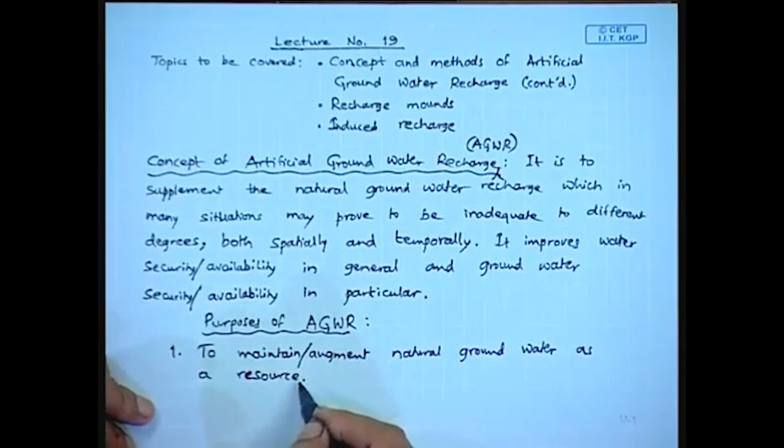This resource is an economical resource as well as an overall resource, because there are certain parameters which cannot be quantified economically, such as intangible benefits. Once artificial groundwater recharge is adopted, it will also result in other intangible benefits like improvement in flora, fauna, and other things, all of which may not be quantified.

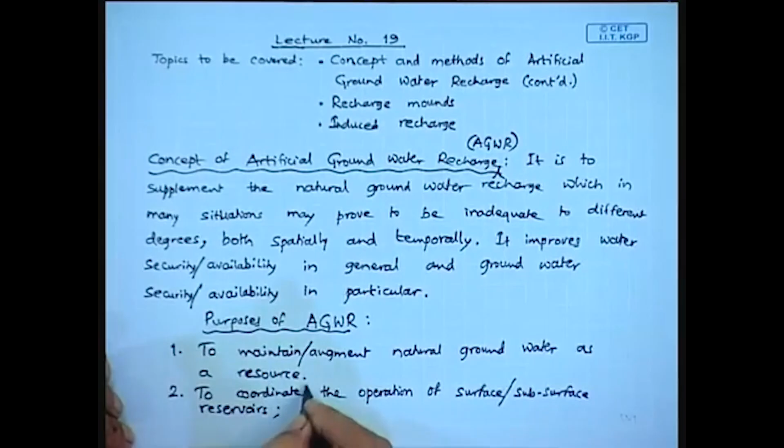The second purpose is to coordinate the operation of surface stroke subsurface reservoirs.

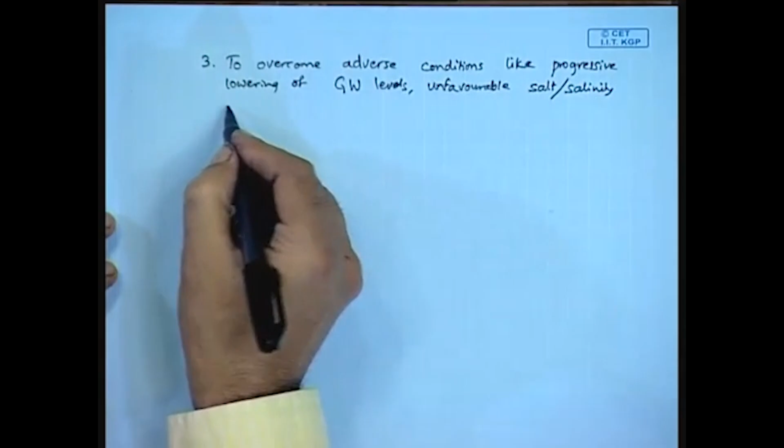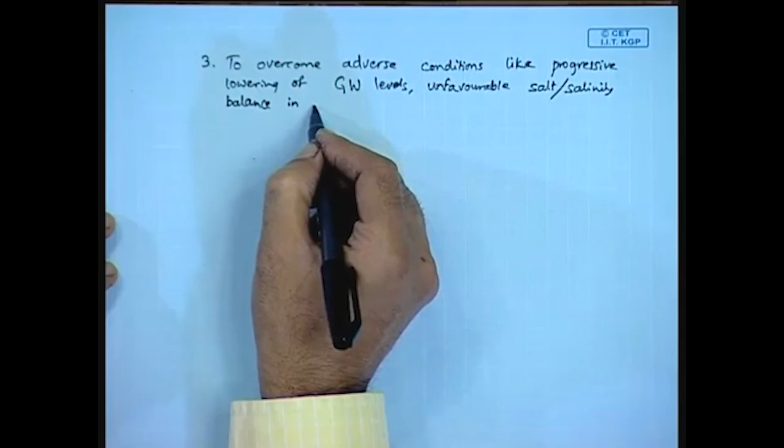The third purpose of artificial groundwater recharge is to overcome adverse conditions like progressive lowering of groundwater level, and unfavorable or undesirable salt or salinity balance in water, which includes salt water intrusion, salinity intrusion, or brackish water intrusion.

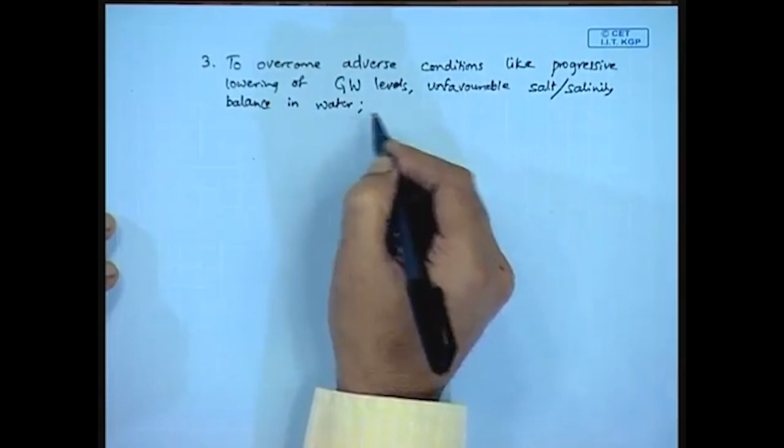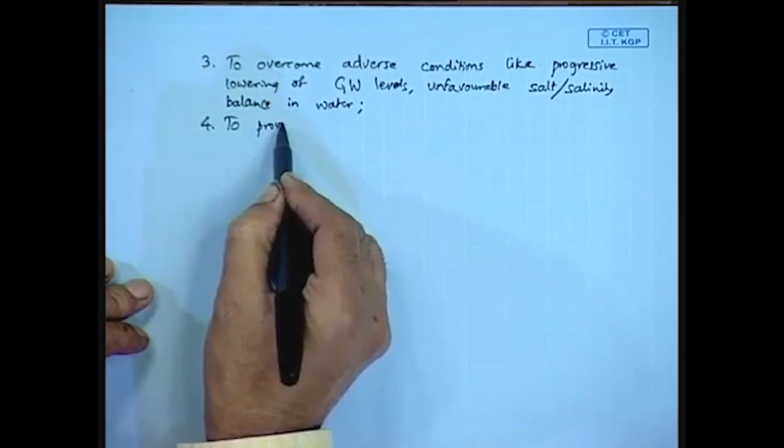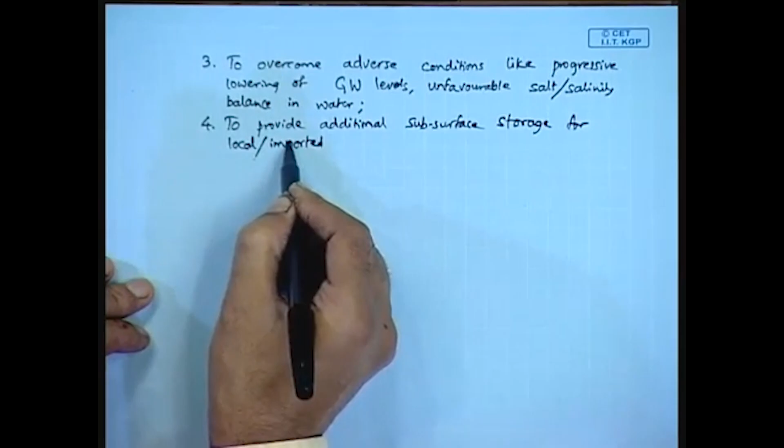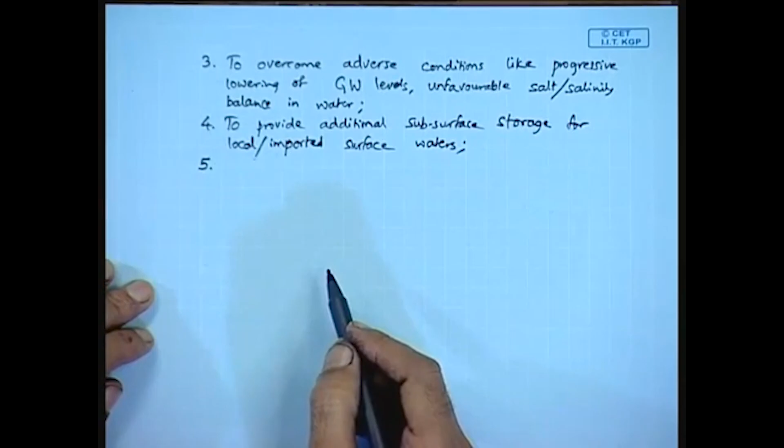This is the third purpose, and the next one is to provide additional subsurface storage for local or imported surface water. Once we employ artificial groundwater recharge, it provides an additional subsurface reservoir, which can be used locally or transported over short, medium, or long distance.

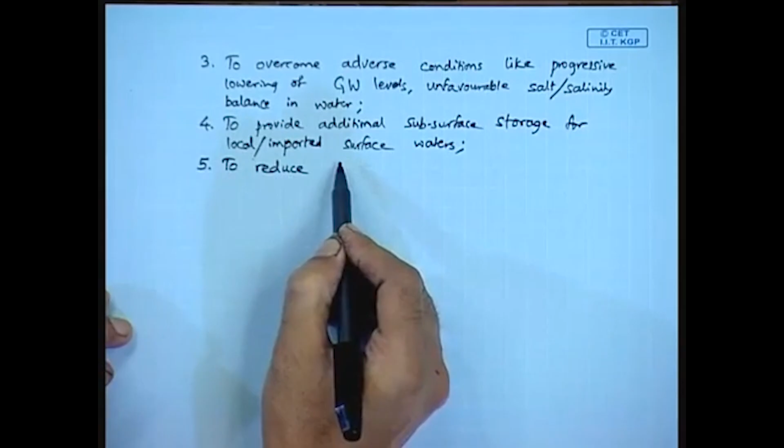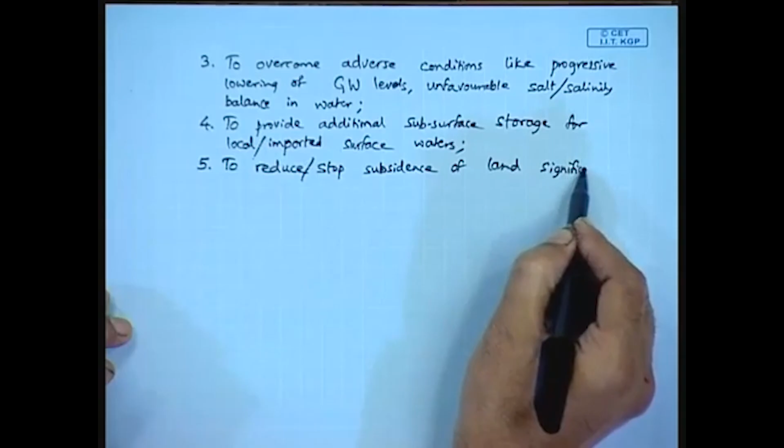So to meet the appropriate water use, next is to reduce or completely stop subsidence of land significantly. Once artificial groundwater recharge is adopted, it will improve the moisture content in the soil, and thereby improve the strength of the soil, making it less susceptible to erosion. It will also be less susceptible to subsidence, like foundation settlement - unequal settlement or total settlement in all areas, which results in land subsidence. That can be reduced or stopped completely.

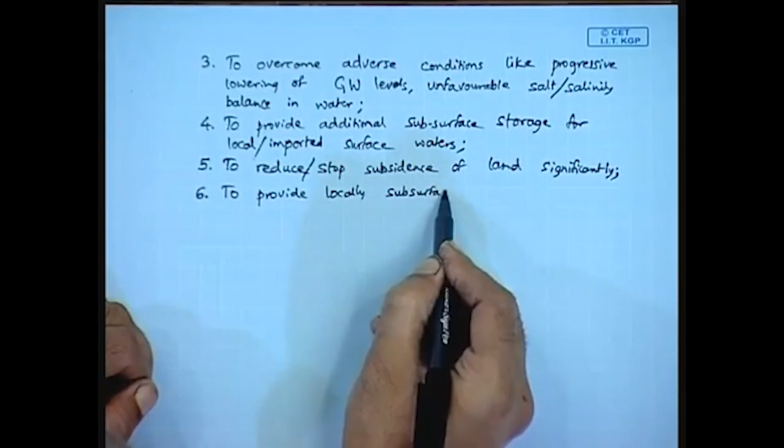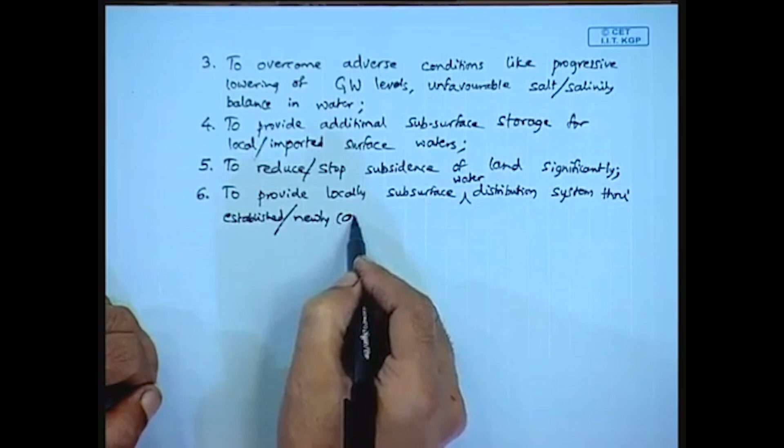The next purpose is to provide locally a subsurface distribution system - this is subsurface water distribution, meaning basically groundwater distribution system, through established or newly constructed wells.

So we will ensure that there is an adequate supply of subsurface water, which can be harnessed through already established wells, existing wells, or newly constructed wells. So this is the sixth purpose.

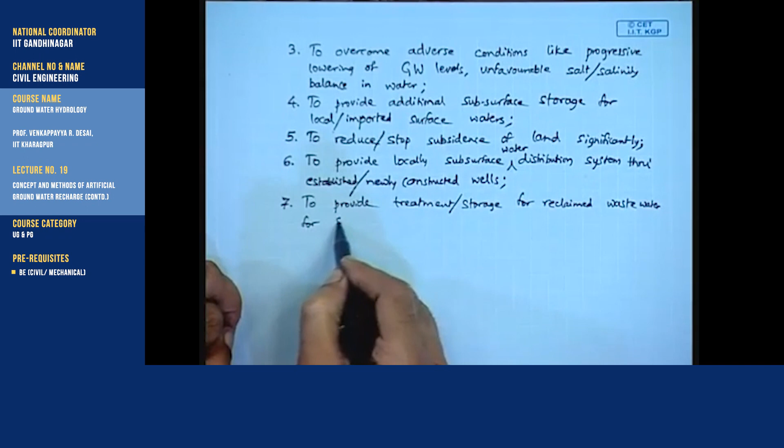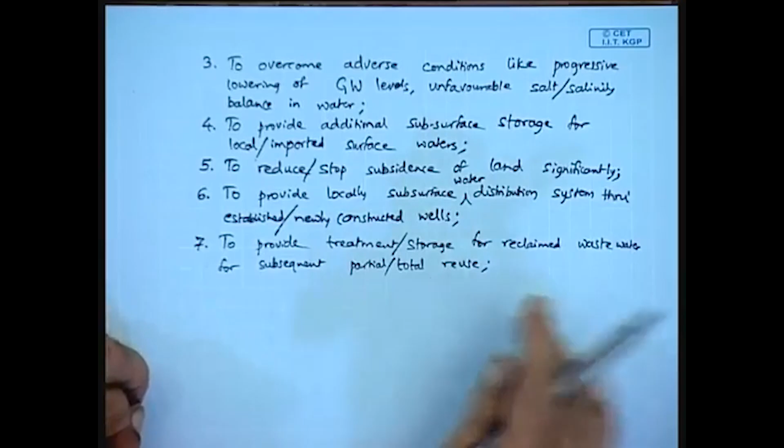So when this wastewater is reclaimed, the artificially recharged groundwater ensures that the reclaimed wastewater is further diluted, thereby minimizing the concentration of pollutants in it. Many times it may be within the permissible limits, or even much below them. In such cases it can be used either for partial reuse or total reuse.

Here I can give an example of this NEWater. In Singapore, some fraction, maybe 5% or 10%, of the water being supplied is added with such treated reclaimed wastewater. So that is this purpose.

And lastly, to conserve or extract energy in the form of hot or cold water.

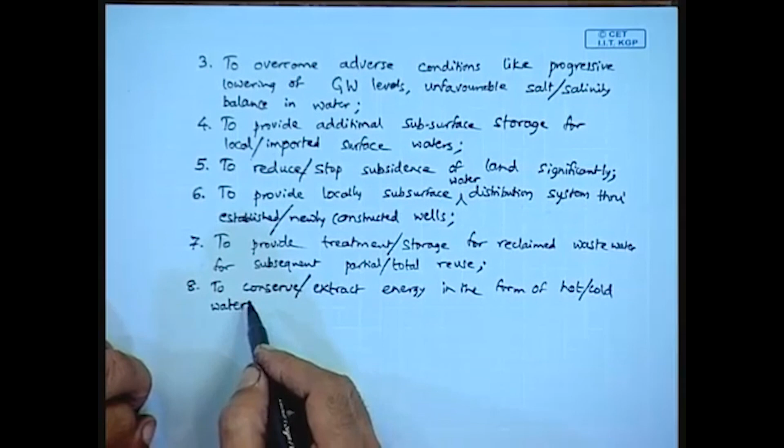We know that there is always an optimum depth below ground where the temperature variation is minimum, and we can utilize this fact to our advantage, creating a reservoir through artificial groundwater recharge.

You can create a reservoir which may be of great help, especially in winters, which is also known as passive air conditioning technology, or in summer when it is too hot, it may be able to provide water significantly colder than the extreme summer temperature.

So all this can utilize the ground as a reservoir or insulator, wherein temperature variation can be reduced. These are the purposes on which the concept of artificial groundwater recharge is hinged.

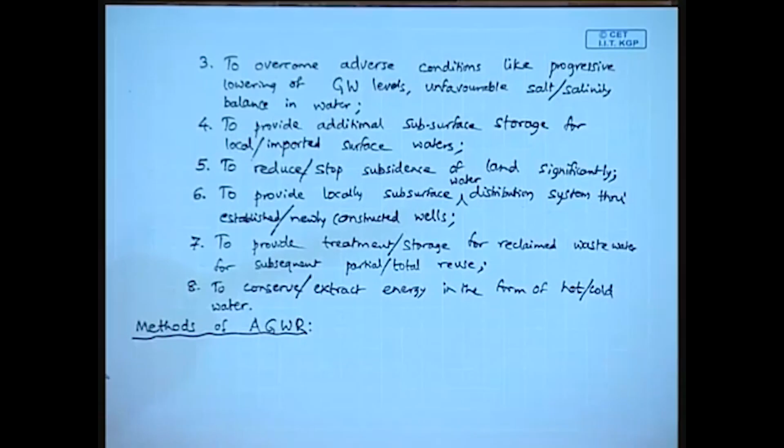Now we will go to the methods of artificial groundwater recharge, that is AGWR. There are various methods for artificial groundwater recharge. Let us list these methods and then briefly discuss them one by one. The first one is the basin method.

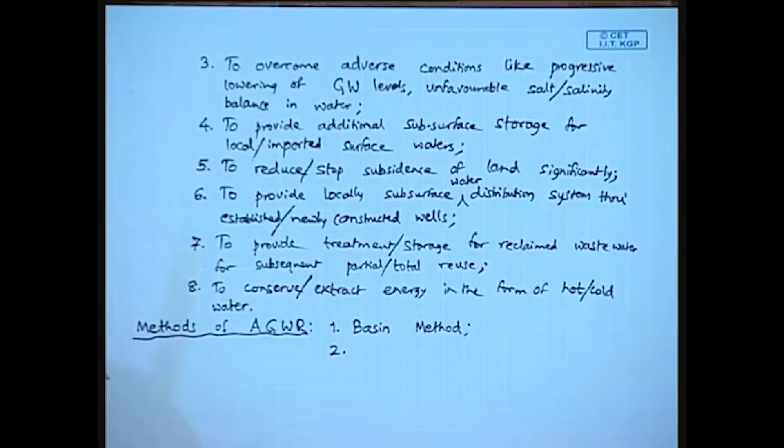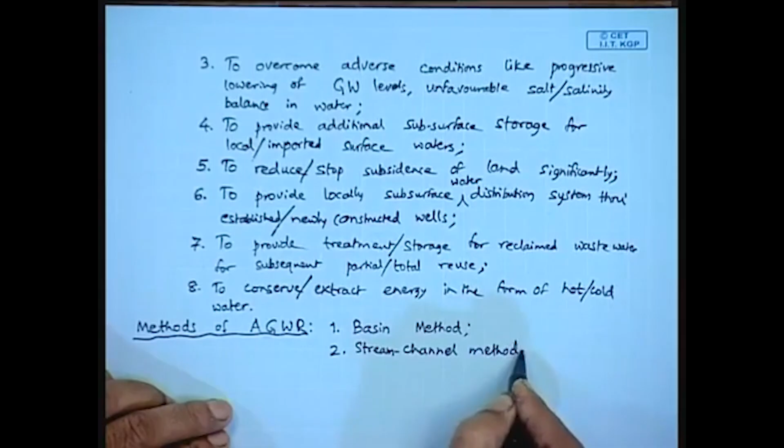This is followed by the stream channel method, and then the third method is the ditch and furrow method.

Then there is the flooding method. The fifth one is the irrigation method. And the next one I am writing here, that is the pit method.

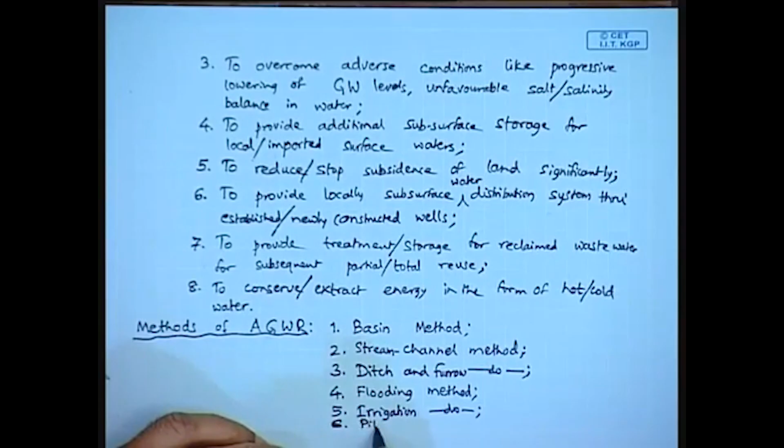Then lastly, let me write here only, the recharge well method. So these are the 7 methods which are generally used for artificial groundwater recharge.

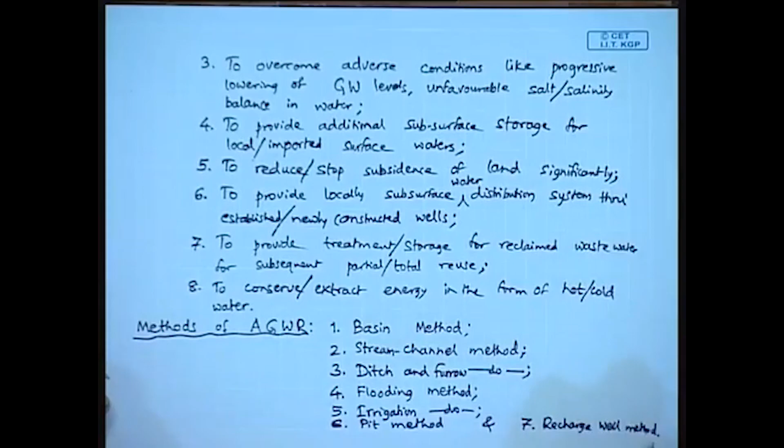Now we will briefly discuss these methods, and the names of these methods, the titles of these methods of artificial groundwater recharge, are self-explanatory. Now first let us go to the basin method of artificial groundwater recharge. I am extensively using the abbreviation AGWR, which is artificial groundwater recharge.

In this method, whenever there is an excess supply of surface water, this surface water is stored in a basin which is in the vicinity of a stream or a water body. For example, suppose there is a stream.

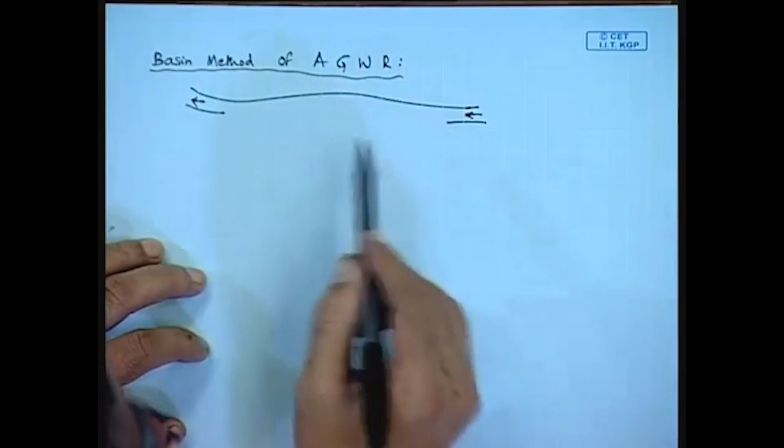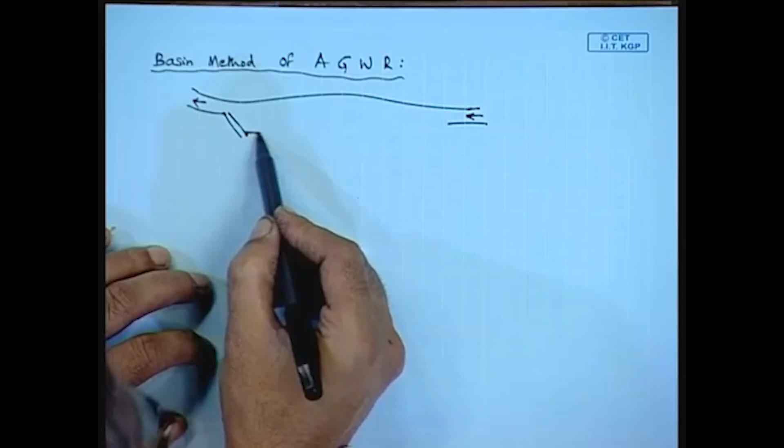Suppose there is a stream, and let us consider the flow is from right to left in this stream. Here is what this basin method does: an additional basin is created.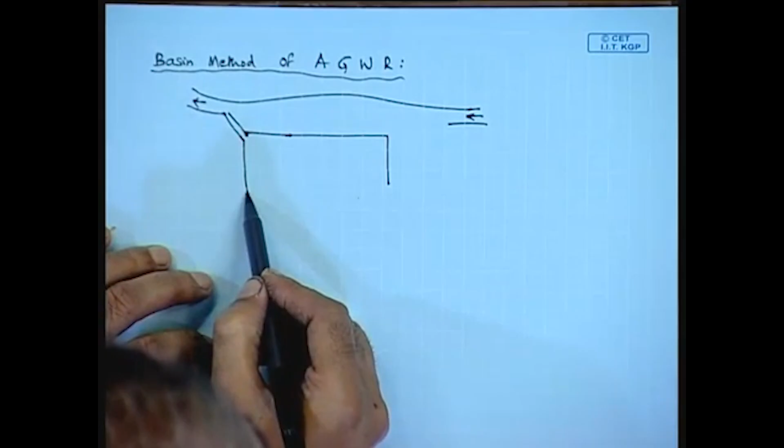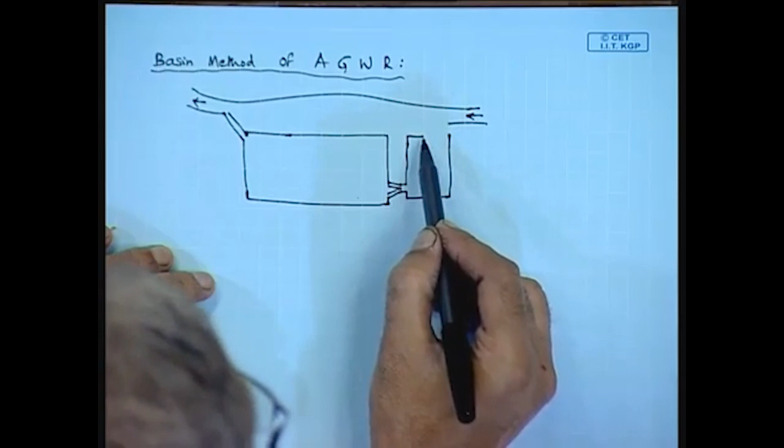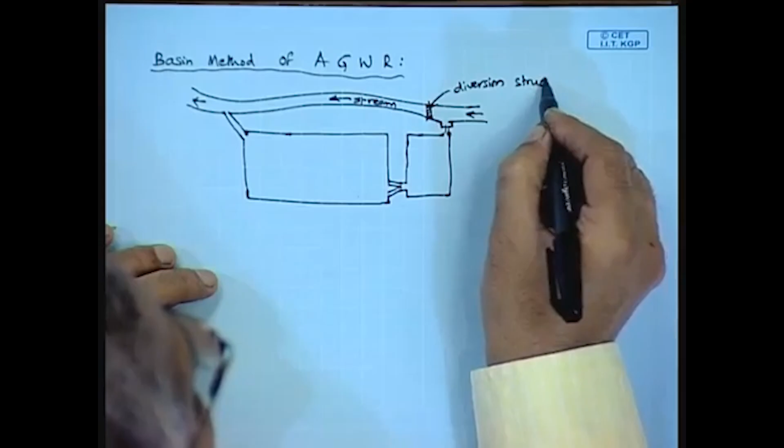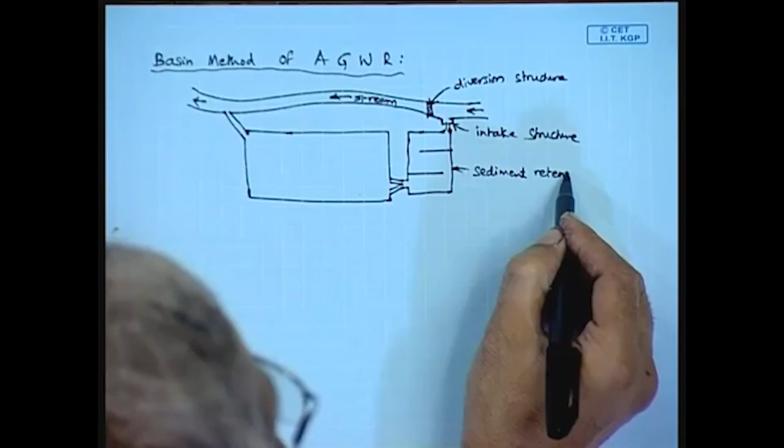So this is the stream or river, and then this is the diversion structure. It could be a small weir or a barrage, and here this is the intake structure, and here this is a sediment retention basin, or which is simply known as a sedimentation basin, followed by...

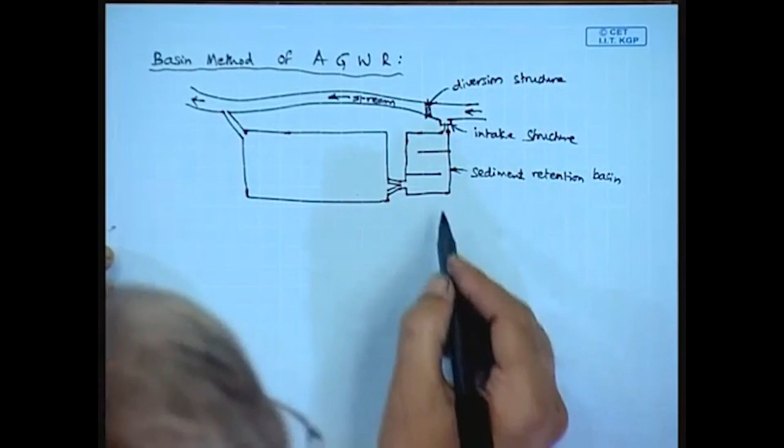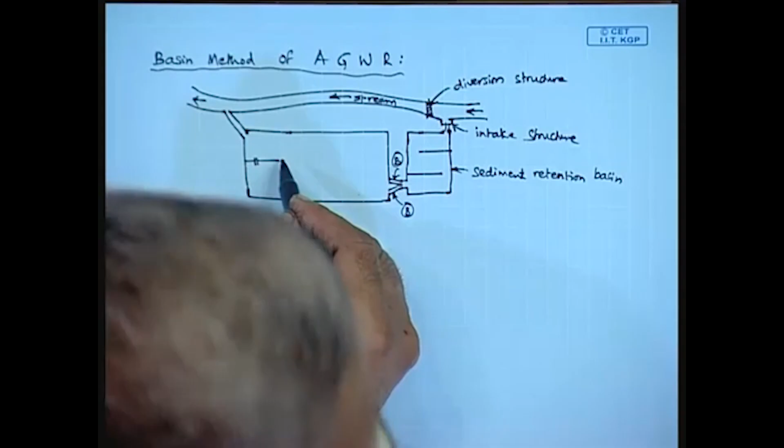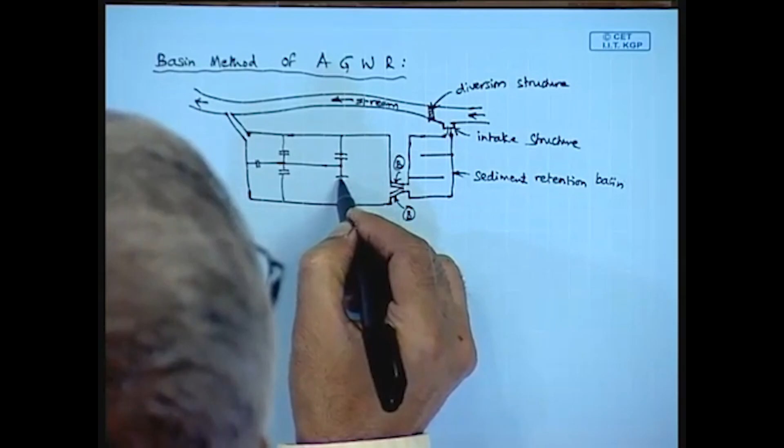Let us denote this as B, and here... like this.

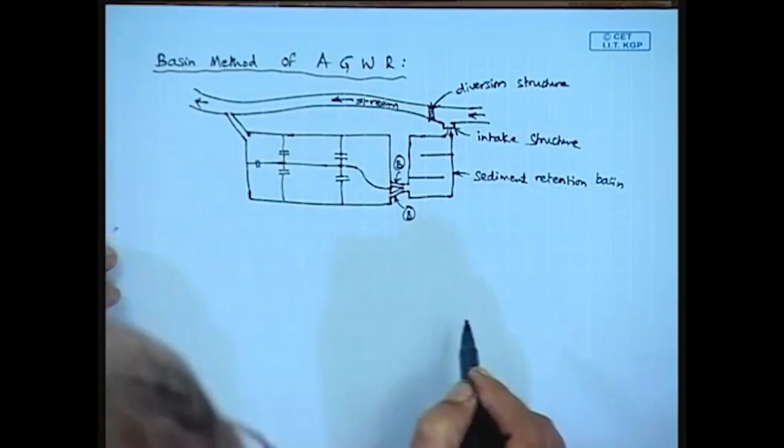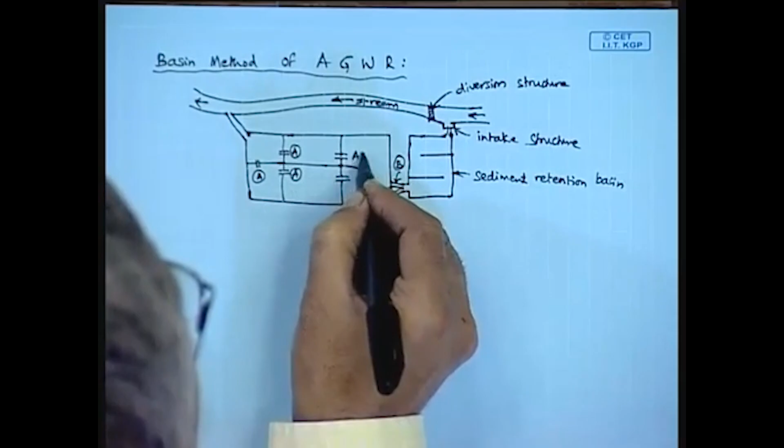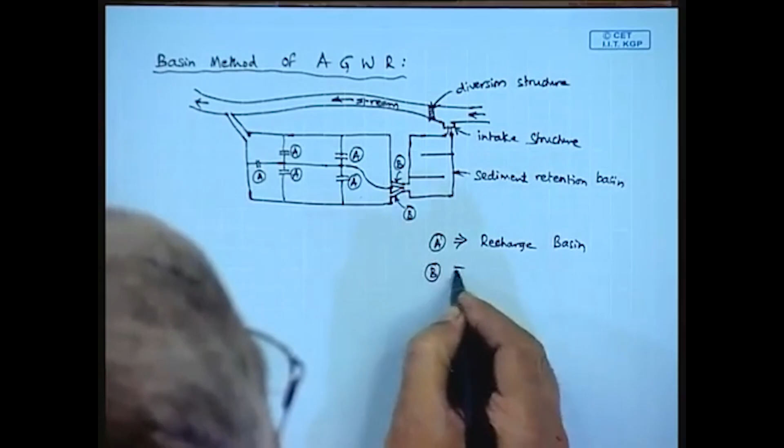So these are A, here this A represents a recharge basin, and this B represents the interbasin control structure, or control/regulating structure.

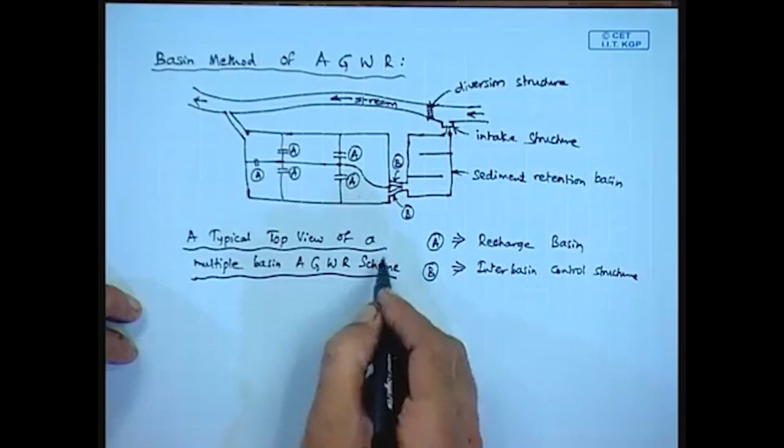So this is a typical plan, or top view, of a multiple basin artificial groundwater recharge scheme. So it will be like this, and it is in the same direction.

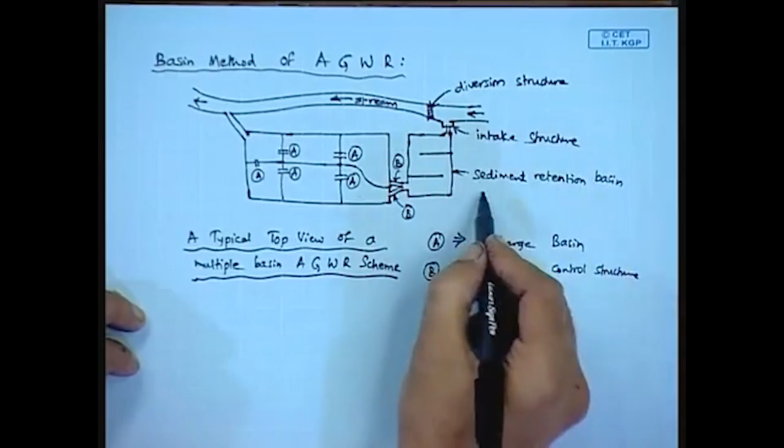Initially there is a diversion structure which will augment the head, and then the water is diverted through the intake structure, and from there it passes through the sediment retention or sedimentation basin, and then there is the interbasin control structure.

By closing this bottom one, we can ensure that these top three recharge basins can be recharged, and similarly if we close the top one, we can ensure recharge only in these bottom three recharge basins. This is the basin method, in which the area in and around a water body such as a stream, wherein it is feasible topographically, can be employed.

Because of this large area of the basin, the flow velocity of water is significantly reduced, and therefore it will induce artificial groundwater recharge significantly through infiltration. Initially the top aquifer, that is the unconfined aquifer, is getting recharged, and then subsequently this also results in the recharge of lower confined aquifers.

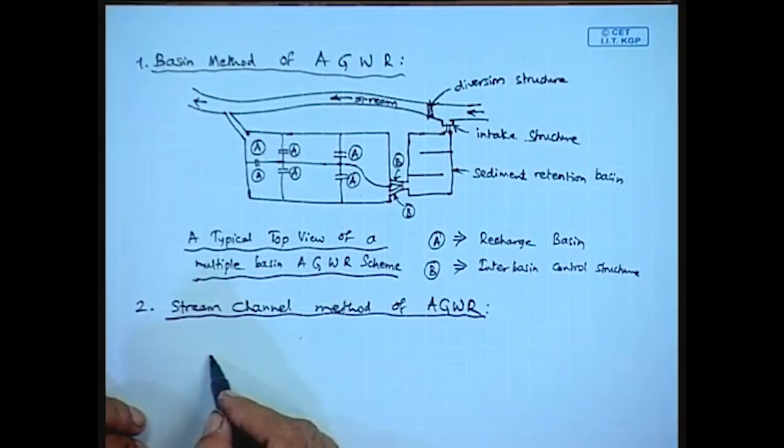Now let us go on to the second method, which is the stream channel method of AGWR. So here, suppose this is the top view of a stream.

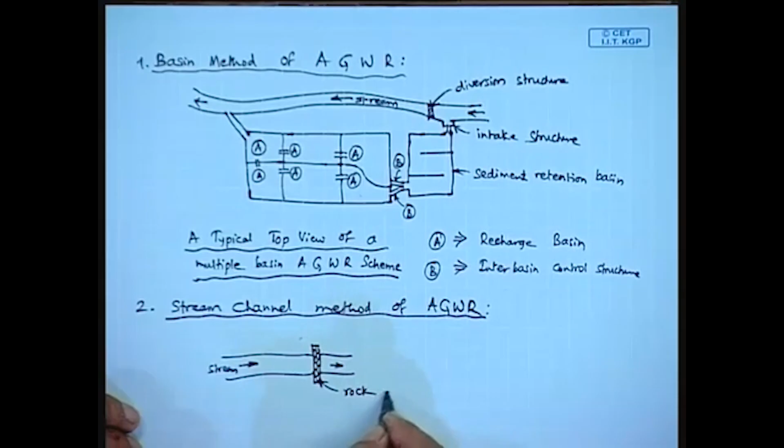In this case, a check dam may be constructed across the stream. So this is a rock and wire check dam, basically a dry rubble masonry.

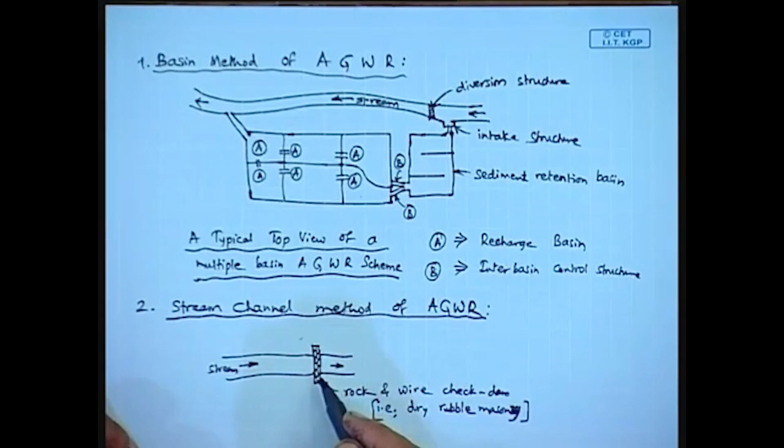Initially it will start as a soil conservation measure, then it also conserves water, and eventually it will conserve vegetation also - the three important parameters to be conserved in integrated watershed management. So the stream channel method...

Suppose this is the original extent of the stream channel, and then the improved extent.

Because of this construction of dry rubble masonry and so on, there will be an additional storage of water. So this is the improved extent of stream channel storage after this artificial groundwater recharge.

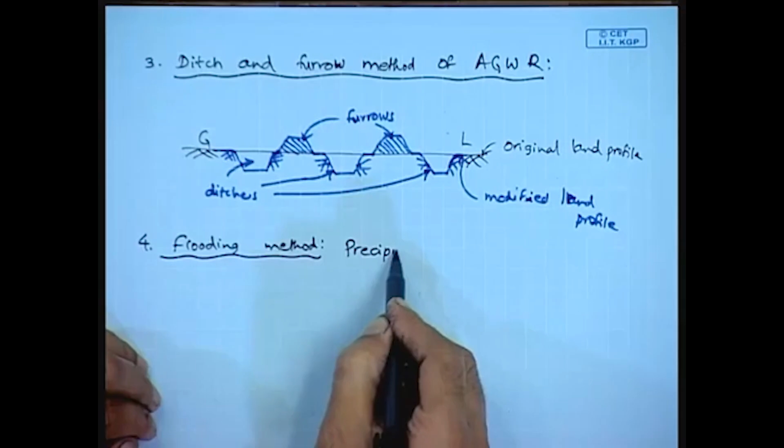So the precipitation water is allowed to flood along the surface at the desired location or locations, such that there is no mosquito problem - this is also known as a vector problem.

Mosquito menace is a problem, so we may adopt various methods so that flooding occurs but there is no growth of mosquitoes and undesirable organisms. Once the water is allowed to flood, it automatically recharges by flowing by gravity in the vertically downward direction, thereby achieving artificial groundwater recharge. Next is the irrigation method.

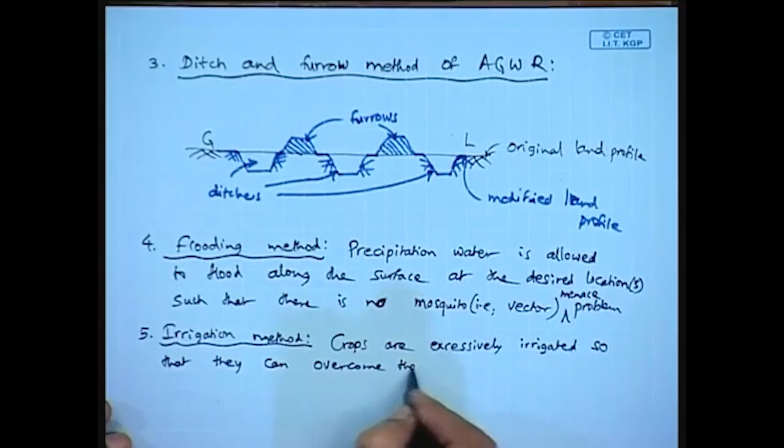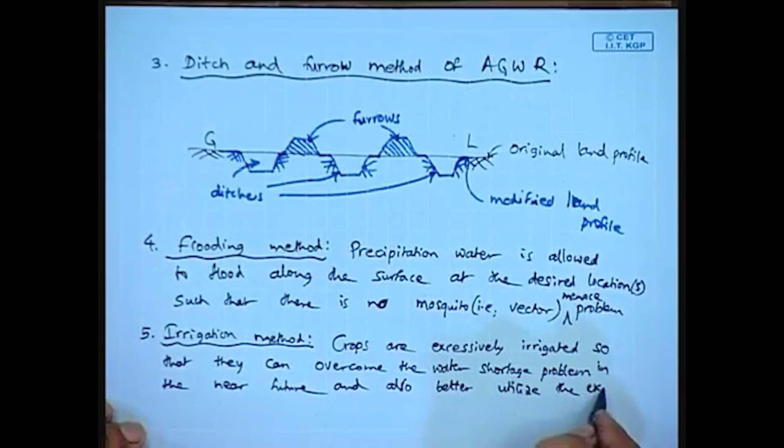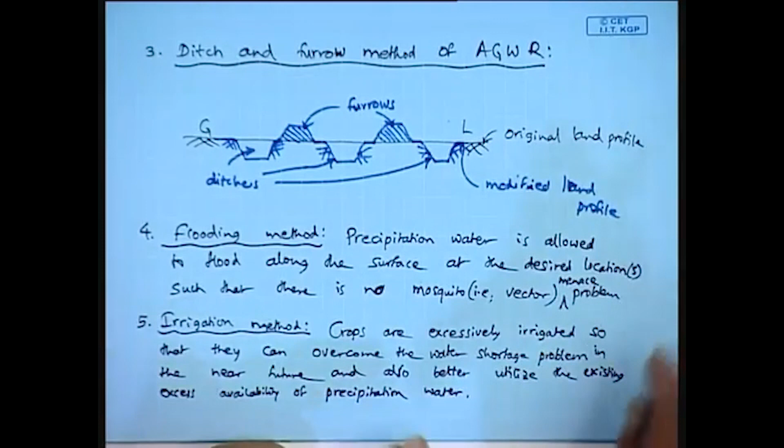This is self explanatory. In this case, crops are excessively irrigated so that they can overcome the water shortage problem in the near future, and also better utilize the existing excess availability of precipitation water or rainwater. Once the excess water is allowed, we may reduce the irrigation frequency and even go for deficit irrigation, so that even if there is a slight delay in the monsoon, the plants are self sufficient to overcome that situation because they already achieved that water availability.

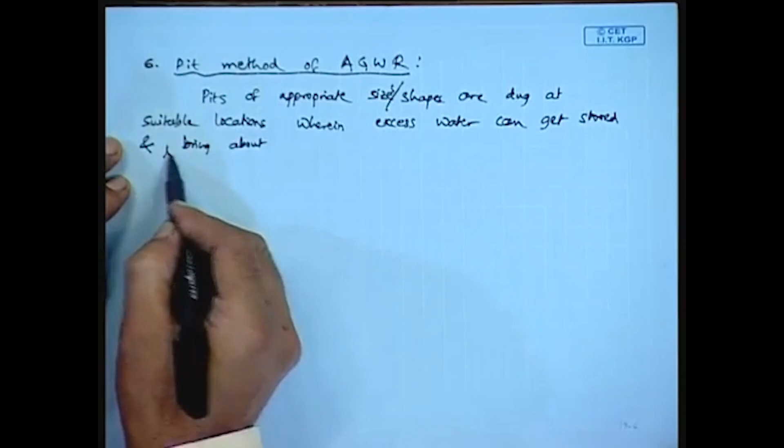This is the fifth method, and lastly there is the pit method, the sixth one, is the pit method of artificial groundwater recharge. This is self explanatory: pits of appropriate size, stroke, shape are dug at suitable locations wherein excess water can get stored, and eventually bring about artificial groundwater recharge.

So these are the six methods of artificial groundwater recharge, and these are not exclusive. We may adopt any new method for artificial groundwater recharge. To give one simple example, the terminology of rainwater harvesting is very popular these days, and this rainwater harvesting is essentially also one form of artificial groundwater recharge. I would like to bring to notice the fact that...

A village lady in interior coastal, rather in coastal Karnataka near the town of Mangalore, uses her old saris and spreads them around. The coastal area, having a relatively large amount of humidity, causes this humid water to condense, and she gets maybe some amount, a few liters, depending upon the size of her sari and the thickness and material. So she harvests the locally available excess moisture this way.

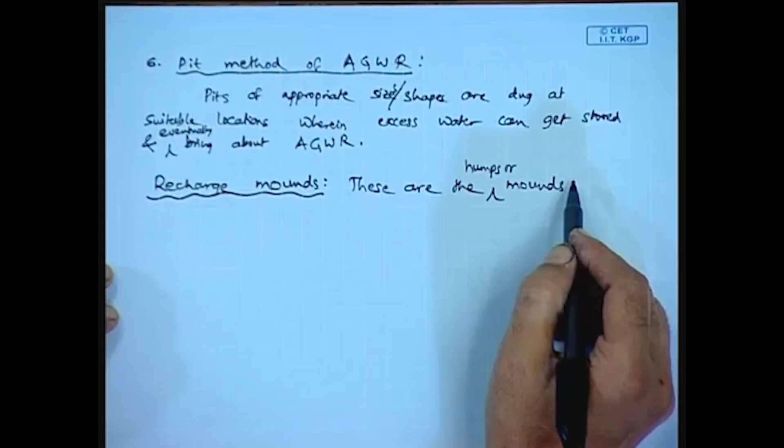With this we complete this topic, and now we go to what are known as recharge mounds. These recharge mounds are essentially the mounds or humps which are created by artificial groundwater recharge carried out on a sustained basis.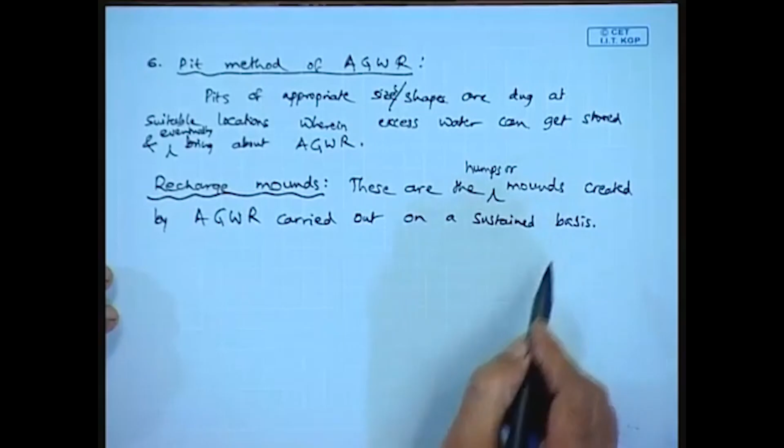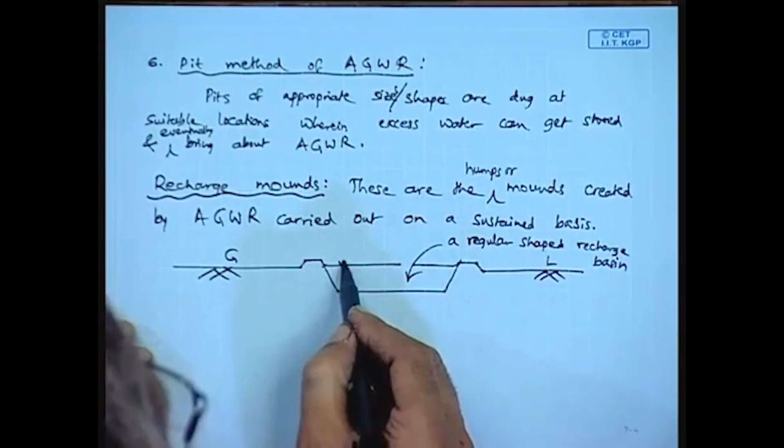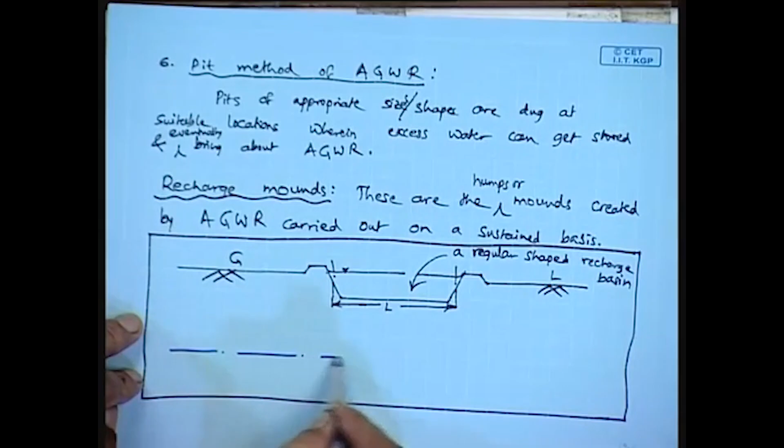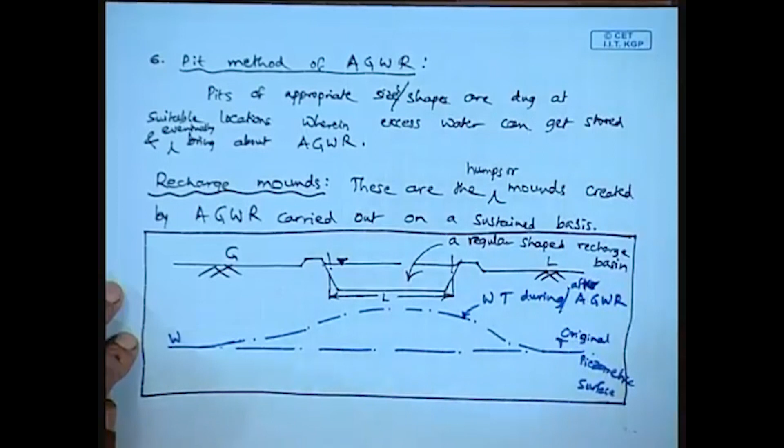Let me draw a typical cross section. Suppose this is the ground surface, and here suppose this is a square recharge basin, a regular shaped recharge basin, which in most cases may be square. The average length of this regular shaped recharge basin is L. Here this is the initial water table, the original water table or piezometric surface. Then, because of the storage of water in this recharge basin, it will form a mound here. This is the water table during or after artificial groundwater recharge. Therefore, this recharge mound is created here because of the recharge in a regular shaped basin. This is a typical recharge mound.

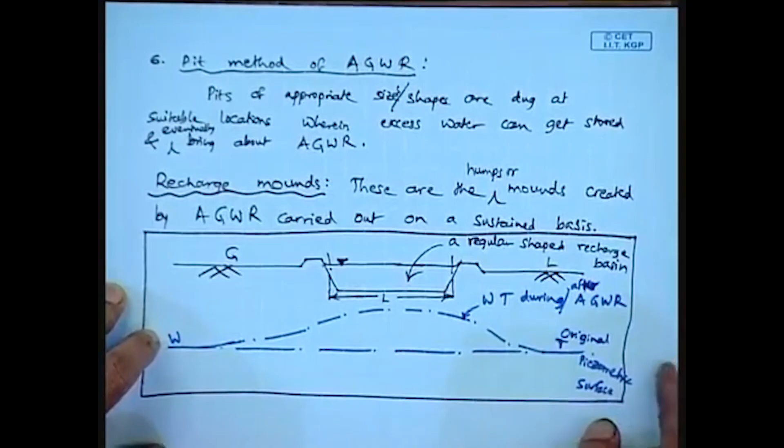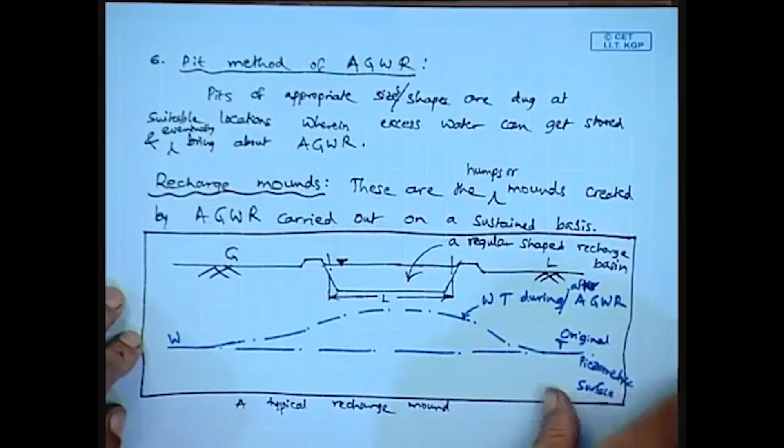Then we will go for induced recharge. I think we will stop here and continue with induced recharge in the next lecture. Thank you.